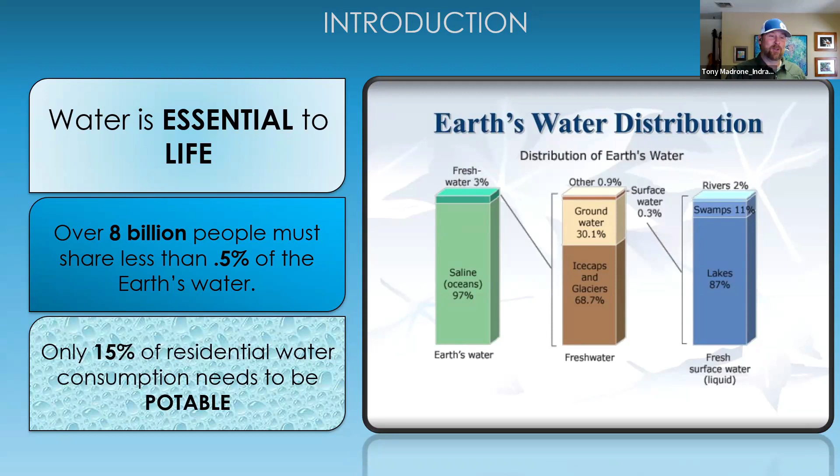So I wanted to go over a couple definitions just so we can all be on the same page with words that might come up throughout this. And if you have any questions, obviously, please do reach out. The restorative resource management. So I know we all know resource management. We approach it from a restorative standpoint, and that is a holistic and inclusive approach to resource management, balancing water, habitat, air, soil, and energy. We need our resources and they need our intelligent use.

So the idea is that I think traditionally we look at resources as, okay, what can we take? How can we use it for our consumption, essentially, as humans? And what we are trying to do is flip that around to consider our relationship with resources as symbiotic. So not only how can we receive from those resources, but how can we give back? How can we ensure that they are sustainable for future generations and around for a long time?

So that's kind of the idea of restorative resource management, is to remove the concept that the resources are here for us to take and use as we want, but more to consider them a vital relationship that we must create together. So that is restorative resource management.

Continuing definitions, we're going to talk a lot about alternative water sources today. So I want to go over the alternative water sources so we all know when I say rainwater, what does rainwater mean, right? So we're going to start with black water. We all know that black water is wastewater from toilets, dishwashers, kitchen sinks, and utility sinks. Currently, black water is clumped together with gray water. So it's all of the water that gets into the sewer piping and the drain pipes of the home. Those typically are all considered black water since it's all merged together. That's why it says can include gray water.

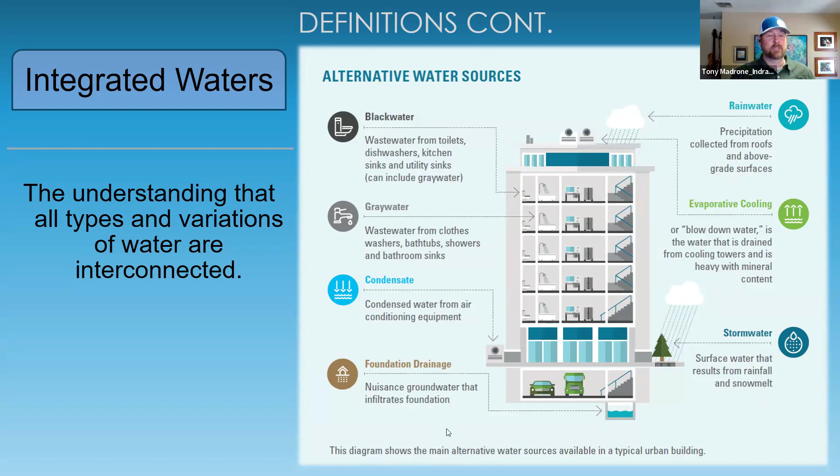Moving on, watershed. I'm sure we've all heard this, but a watershed is an area of land that drains rainfall and snowmelt into streams and rivers. I like to consider it all of the water that creates a river. What's all the water that leads into a river? That's a little too simplistic, because there are groundwater components that come into play. But essentially, it's all the rainfall that falls into an area, comes together, and typically leads into the ocean at some point.

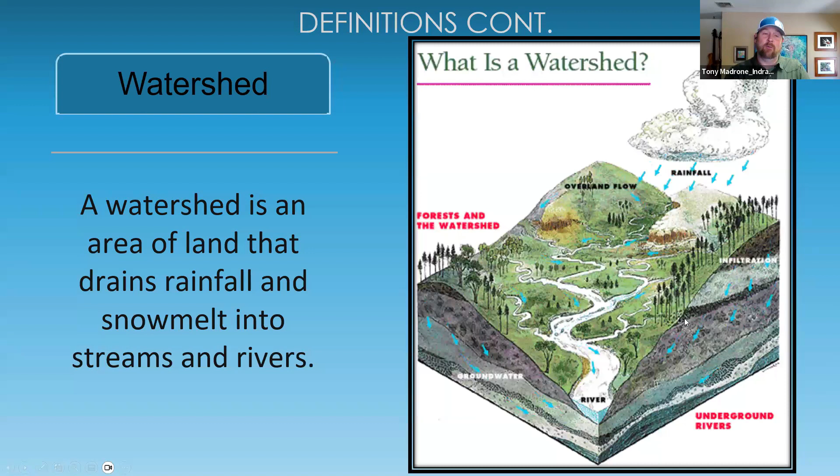So that is a watershed, and it's an important idea because any one thing that happens to that water within a watershed can impact all parts of that watershed very directly. So that is an important concept to look at. Okay, so that sums us up with general definitions. And now I'm going to go into some ideas and thoughts to look at.

I have segmented out this presentation to look at different parts of projects where we can consider water reuse, or where water is an important part. So the first one we're going to start with is buildings. And that's what I know you all work a lot on. And so this is a really important piece of the puzzle.

Something that I always try to encourage and talk to architects about is this concept of dual plumbing. Dual plumbing is the process of providing separate plumbing for non-potable and potable supplies, as well as gray water and black water discharge piping.

So essentially, how that would work, and I'll give you an example here, is that you would have your potable water supply that feeds the sinks, the showers, the refrigerator water, all of the different things that we interact with in a way that they need to be potable. But the non-potable demands in a home would primarily be the toilets, for example, or also the laundry is another example.

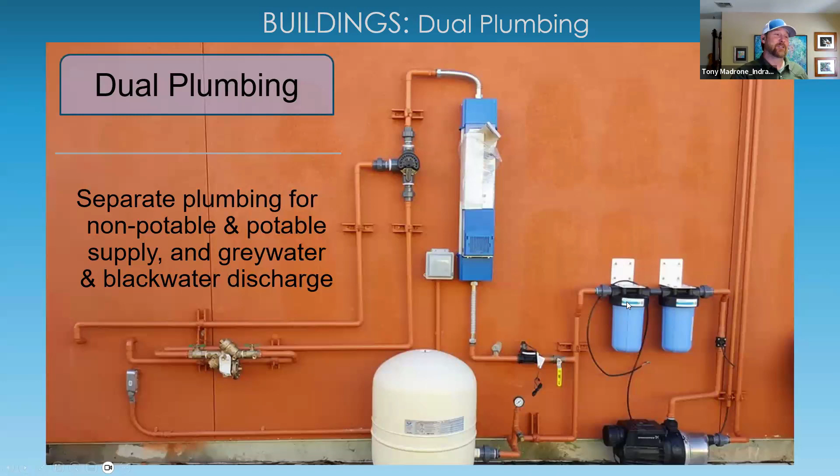So that's dual plumbing. It's really important, and it's something that I personally am trying to encourage as many people as possible during the remodel process or the new build process to just dual plumb. It doesn't cost that much extra to do when that home is being built. It's literally 10 times or more costly to do it after the fact. So if I have to get in there with my team and start cutting all those pipes up to get the gray water sources out, it'll cost 10 times as much for us to do it then as it would if it was done while the building was being built. So that's something, hopefully, if nothing else happens, that maybe you all could consider dual plumbing as something to incorporate into your designs as you go forth.

So then in the buildings, the indoor non-potable reuse. So we sort of went over that. The primary sources for indoor non-potable reuse, again, are toilets, flushing toilets, and laundry. Laundry supply is a little tricky because oftentimes you'll have hot water and cold water going into laundry. And so that hot water, it can be non-potable, but it just means you have to have a separate heating system for that water. And it can be a little bit difficult to do. So we'll typically just use the cold water feed as the non-potable reuse supply.

But non-potable reuse is the treating and reusing of rainwater, gray water, stormwater, mechanical water, and/or black water for indoor non-potable supplies, toilets and laundry. Now, the black water one, I think probably gives people a little bit of the jitters, like, oh, we're bringing black water back into the house. And so that doesn't happen that commonly. It's not one of our high level, let's do this regularly.

That's for typically larger buildings. I think a good example is the SFPUC building. If you haven't ever visited it, it is amazing.

They have a beautiful living system that takes all the black water, all the wastewater from the entire building, treats it through some natural solutions, BMPs, and treats it to the point that water can then be reused as a non-potable indoor supply, and they flush all the toilets in the building with that treated black water. So it can be done, and it's pretty cool. But definitely the rest of these are a lot easier to get prepared for bringing back into the building.

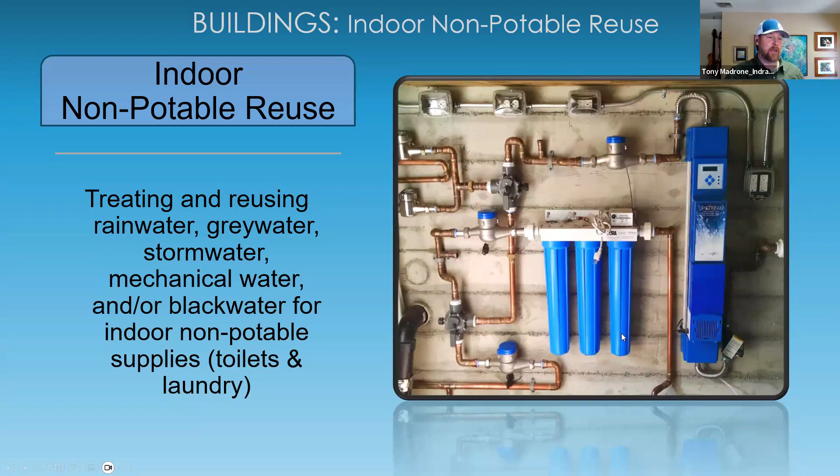So the dominant source is the gray water. So the gray water feeds first, and then the rainwater is the backup when gray water is low, and then the municipal water will be the final backup, all done automatically. And I can go into that a little later on, but so that is indoor non-potable reuse.

The other thing with buildings, and this is kind of a big one we'll go over quite a bit, would be rainwater collection. So rainwater collection is something we do a lot of. It's really clean. It falls on the roof. It's the rainwater. The only thing that makes it not clean in our area, some places have acid rain and other challenges that they're facing. But for us, it's just how dirty is that rooftop?

So we do things like a first flush filter, which you can kind of see over here. So that'll help to kind of clean anything that might be dirty off of that roof when it first falls, send that away from the tank. And then once that roof is a little more clean, we can send it into the tanks.

But rainwater collection can be used for irrigation, fire suppression, water cooling towers, toilet flushing, as well as potable water for households in some counties. Sonoma has one permitted potable water supply for rainwater, but in general, California is scared of that.

But if you go to Australia and Hawaii and a lot of other places, they use it all the time for potable water. Texas is actually significantly ahead of California. There's tons of permitted potable water supplies for rainwater in a lot of areas. So it's starting to happen in California, but there's still a lot of fear around it. What if? There's always the what ifs.

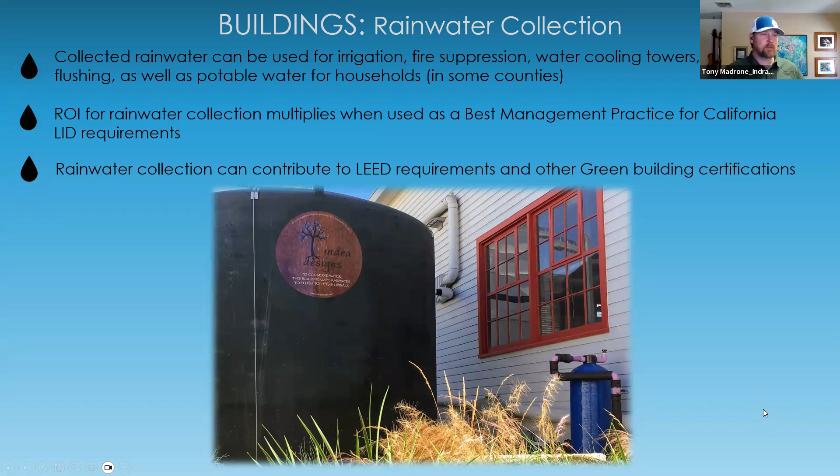So I'll give you a couple examples of some rainwater collection systems that we've done and how they can operate, just so you can see. This is a system in Menlo Park. This is a 10,000 gallon underground cistern, which was a nail-biting, fun experience of sending it over. This house was just newly remodeled, so it's a beautiful home, and we're sending a 10,000 gallon tank and a crane over. It was a stressful day.

But this system saves 15,000 gallons of water per year, and it's a 10,000 gallon tank. It's 15,000 gallons because we still use some irrigation during the rainy season, so that tank will refill a few times on average over the course of the year. It doesn't refill fully, but it will refill partially to make that 15,000 gallon number. So it's not just 10,000 gallons.

But this site also had some drainage issues, and Menlo Park was requiring them to mitigate the entirety of their rooftop. So we took the entire rooftop and put it into this tank that then overflows into a rain garden afterwards. The buried tank is nice because a lot of times, especially in the more urban environment, we won't have a lot of space in backyards or front yards. So we can be creative with underground. We can put them under driveways, under all kinds of different things.

And on top of this tank specifically was a beautiful vegetable garden. We created these vegetable beds, and they could grow all kinds of fun food on top of it. So that was a pretty cool project there.

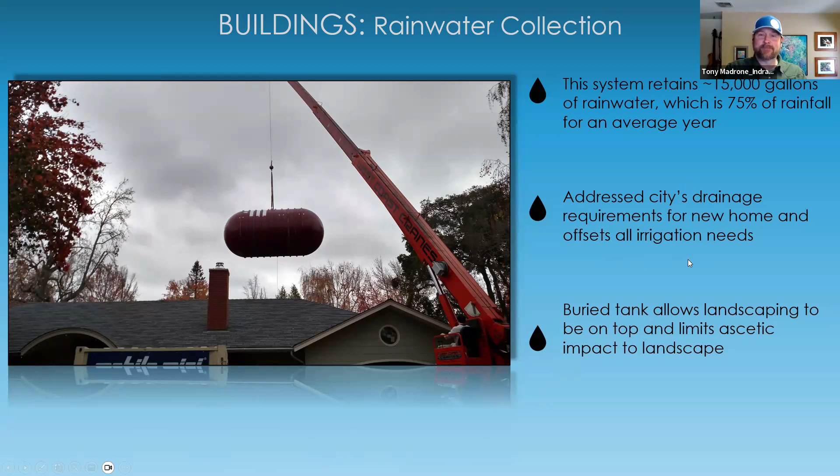This is another example of an underground system. This is an 8,000 gallon system that over the course of the year will mitigate 14,000 gallons of storm water. The rainwater is used for all the irrigation in the backyard and toilet flushing in the home. Again, this is a tiny little backyard in San Francisco. We had to work with the angle of repose and meet all our setbacks. But the city of San Francisco was really excited about this. It worked out because it wasn't a totally tiny backyard. It was kind of long, and we built a deck on top of this cistern.

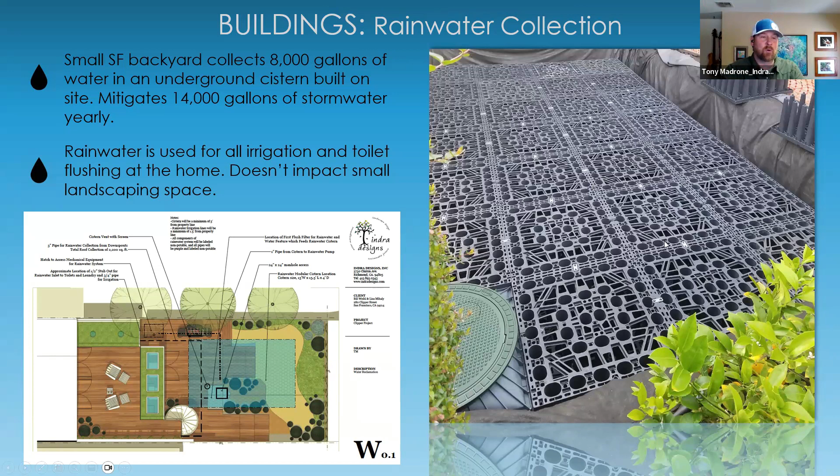So this cistern literally lives underneath this beautiful deck that they have. And then they have some landscaped areas. And again, it flushes toilets and also does the irrigation for the whole backyard there. So that's another example. And these are modular systems. I'll show you one more of these here.

What's really neat with these modular systems is that they can be any size. I mean, relative to the cube that it is, but they can be any size and shape. And they're also incredibly strong for having a 98% water capacity. 98% of this space is still water, but they have incredible strength.

So you can actually put these underneath driveways, parking lots. They oftentimes use these for stormwater detention and big projects like that. But we also use them a lot for rainwater collection, which in my opinion is also stormwater detention. And so, yeah, that's pretty cool.

This specific one is in, where was this one? Oh, Pleasanton. And it mitigates over 50,000 gallons of stormwater. The collected water is used to irrigate an entire 1 acre of landscape in Pleasanton. So they wanted to landscape this huge area and have a pool. Obviously, the city of Pleasanton was like, wait a second, you can't use all this water. That's going to drain our entire supply. But they really wanted to move forward with it.

So we helped them, one, design intelligent landscape so that we're using the least amount of water in the landscape as they could. But two, we put in this huge system that will cover all the irrigation needs for their site. And then we put a bocce ball court on top of it. So it's kind of a cool finish to the whole thing.

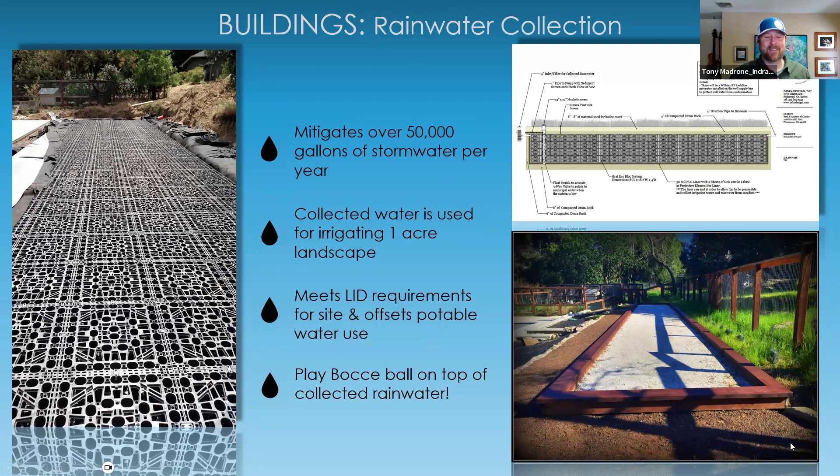But this is just some unique approaches to rainwater that's not just your typical tank that gets thrown into a yard, although most of our systems end up being above ground tanks. And then this one is the last one I'll talk about. This was back to that system in Alameda that I was talking about. I kind of already went over this, so we can mostly skip this slide.

But yeah, 92,000 gallons of stormwater off of the building's roof are mitigated and dealt with. But that means also that 92,000 gallons of potable water are saved by using non-potable water supply from this system.

Tony, I think Mercedes has another question. Oh yeah, please go ahead.

Thank you. So my question is about the use of the term, the rainfall needs. I'm not going to get the phrase right, but is there a way in which the annual rainfall calculations use some kind of average, and how do you deal with that with all of our change? Like, how does that work?

For sure. So we have a process. We can do it on a daily basis if you want. So we take CIMIS data primarily, and then we use the past 10 years, and we do a low, moderate, and high season. And we typically will size our systems to the low. At least we'll size the need of the system to the low, but then we size the piping of the system to the high. So we want to make sure that in the event of a huge 100-year storm, the pipes are big enough to collect all of that water that might come dumping off of that roof.

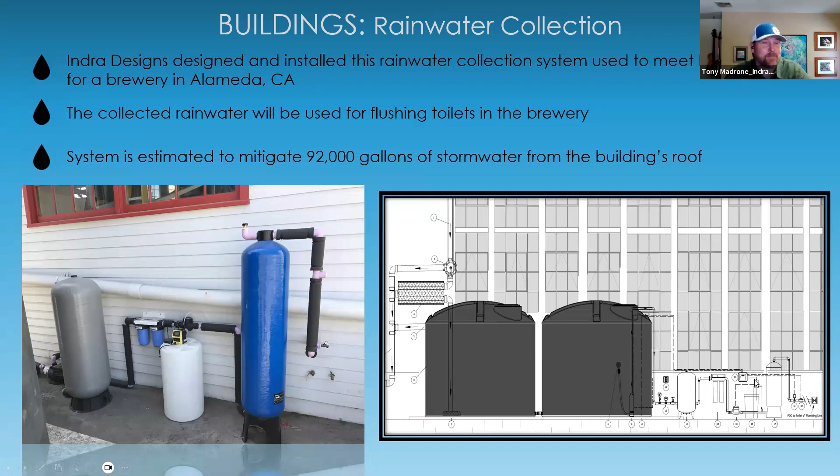Thank you. I have another question, if I can. So in California, for example, we have a diverse climate situation. We have dry deserts, we have mountains, we have snowy areas, we have coastal areas. Is the logic to these kinds of systems uniformly applicable to all these areas, or are some kinds of areas more or less conducive to these kinds of systems?

Great question. And absolutely, because it varies so much, it's very much a site-to-site situation. A good example, just to take it even outside of California, would be the East Coast, or let's say Portland. In Portland, you can have a 500-gallon rainwater cistern, or rainwater tank, and that would be enough for your entire landscape for the whole year, because it's refilling every week in the summer, or Texas, all these other places. So California, yeah, it's very climate specific.

And Southern California is much more difficult to deal with than Northern California and the Klamath region, or Humboldt. So every single site is going to have a much different analysis that's going to lead us to identify, okay, these are the demands we're trying to meet, and based on that climate and that region, these are the challenges that we face and what we need to address. Snow is a big thing in these systems. Freezing can definitely happen. So the high mountain regions are a little bit more difficult and take some more thought and care, as almost any part of the home does in those areas.

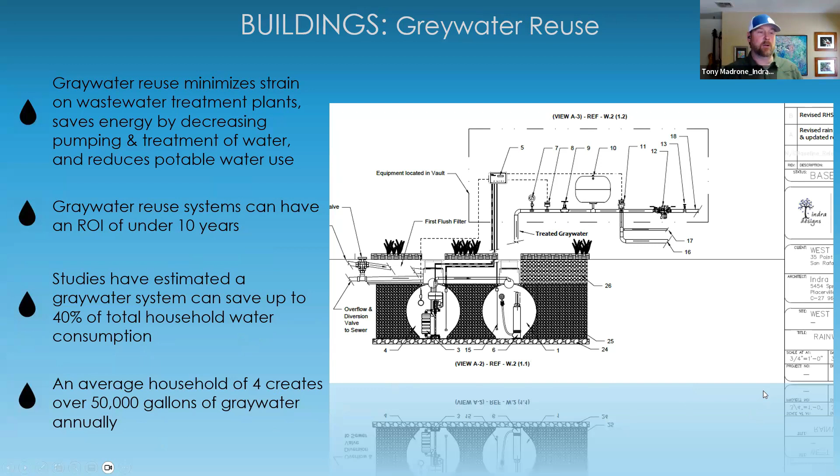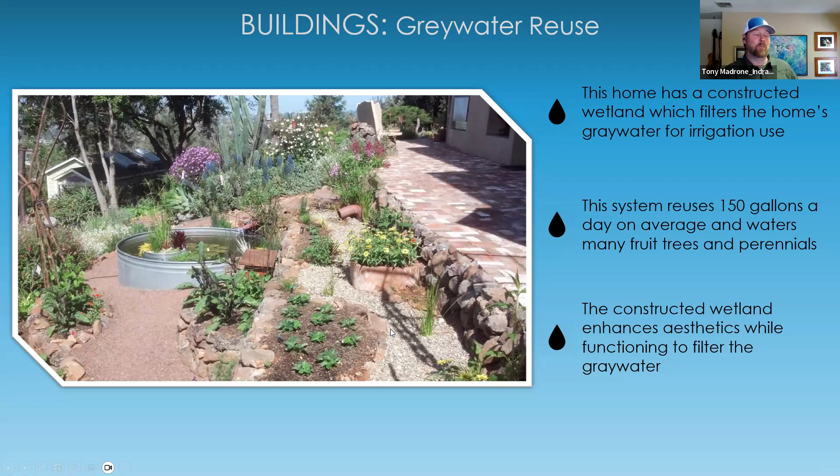This was a home that was being built, and we worked with the architect to actually design the gray water system. So we were able to say, we need the gray water pipes to come out right here. It was a wonderful experience. So that's an example of a gray water system. What I like about this type of constructed wetland is that in and of itself it's a beautiful aesthetic to the home. It adds aesthetic value while being useful to the filtration process of the gray water.

There's also laundry to landscape, which I don't have in here, but those are the simplest, no permit needed. You just take the discharge of your laundry and send it directly out to mulch basins. Yes, I have a question. You said that the gray water has to be distributed underground. So the first question is why, and the second question is, can you use the gray water to irrigate edible things, vegetables? Okay, both of those are awesome questions.

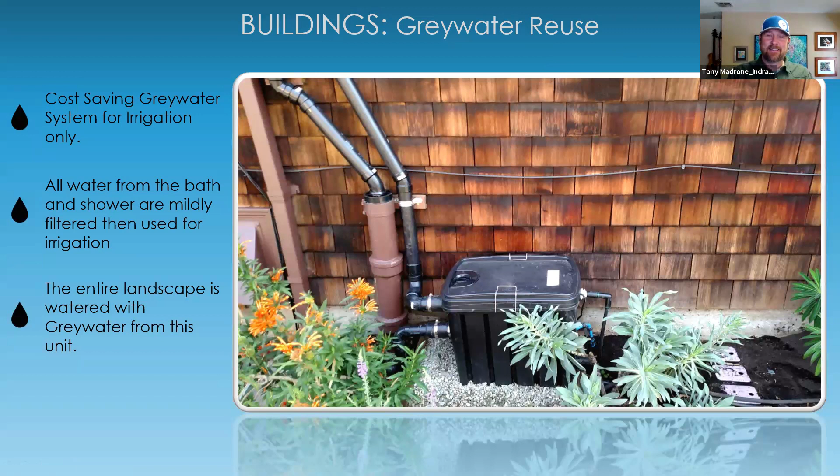All right, let's keep moving. I think I'm gonna have to hustle through a little bit. I might get a bit behind, but if we're getting questions as we go along, then maybe we won't have as many at the end.

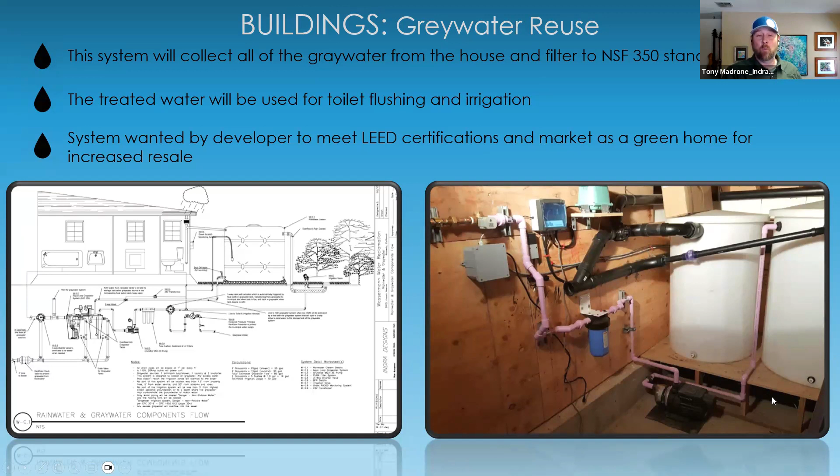Again, because it's gray water, it does need more maintenance, making sure that system really is clean, because things can go awry in gray water pretty quickly. So there's a higher maintenance piece to it than rainwater for non-potable reuse, but it's pretty cool that you can do that.

And then mechanical water, we haven't done a lot of. We did a little bit on a building in San Francisco for the cooling towers. The blow down water we used in a cistern that was combined with rainwater. And so that was kind of cool.

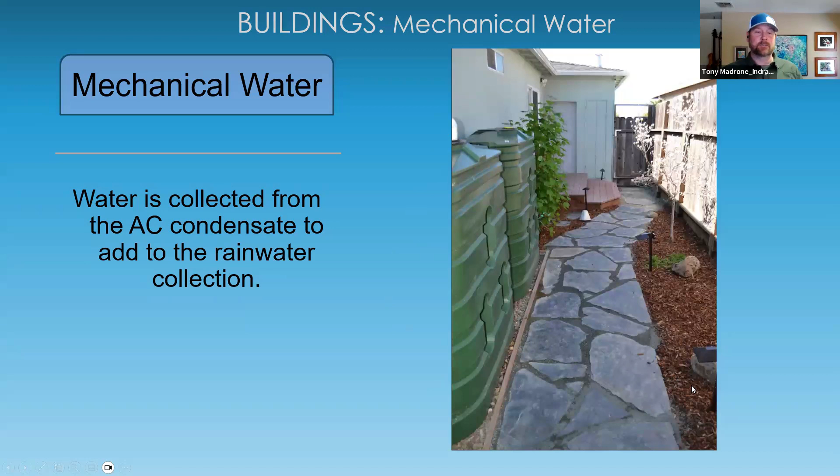And this is a small residential where we actually took the condensate from the AC, which I think ended up being, in the summer heavy running months, a few gallons a day or something here or there. But it was something. And so that got added into the rainwater tanks because they were dry by the time the AC was kicking on regularly. So anyways, it's something that can be done and considered, and just a nice reuse for that condensate.

All right, so that was buildings. So now we're going to move on to sites. And again, I know you all do this. You have to do your grading plans, your drainage plans. All of those are essential for the building that you'd like to put on that site. You have to really consider the site.

So we like to consider ourselves the step before the civil engineer, and we oftentimes will make the civil engineer's job easier because they'll have less drainage to deal with, less issues and challenges, and less grading needs to deal with the stormwater.

So site water, again, is all that water that's falling on the site that's not the rooftops. And for stormwater and site drainage, there's a bunch of natural solutions that can be considered to mitigate that stormwater that all happen before the drain basin, before we get it into the pipes and send it into the stormwater system.

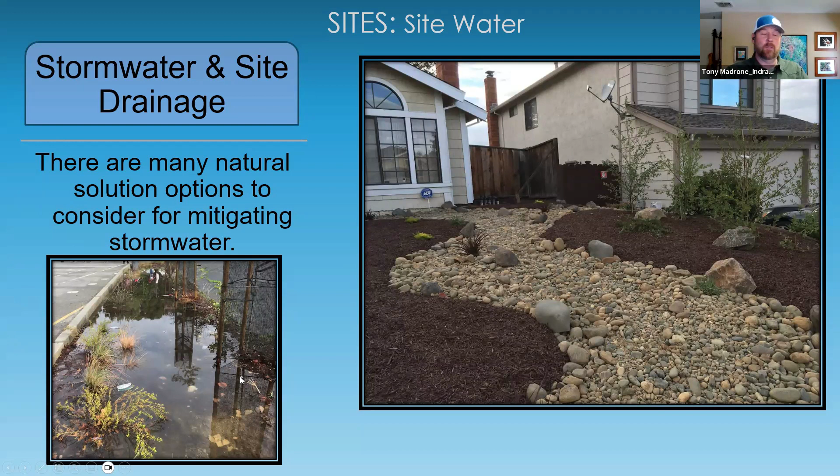So, and then here's that site for the water quality. I wanted to say this is another large bioswale that we did. This is in Richmond, and this is off of a parking lot. So we went into a parking lot, we redid the parking lot, and actually added 2 parking spaces, even though we made the parking lot smaller. And then we did all these curb cuts along the edge of the parking lot here. And we added curb cuts into all the little, there's another bioswale that's up this parking lot a little ways.

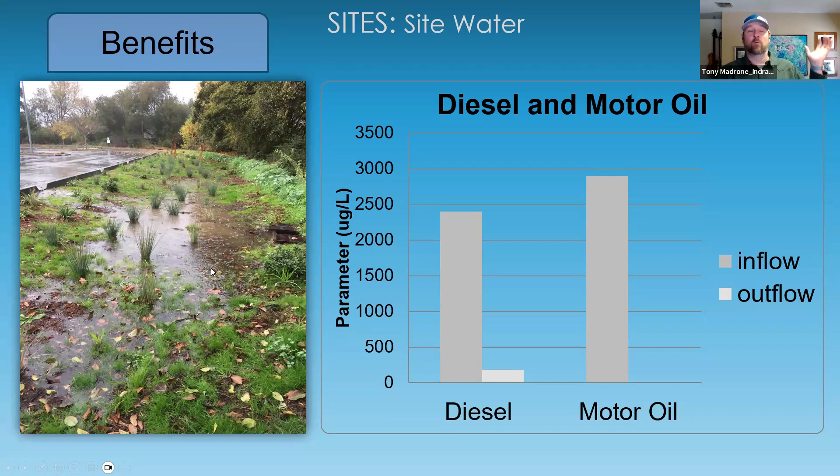And then amazingly, motor oil was a much higher number. And by the end, at the outflow where that goes into the creek, we had 0 trace of motor oil. So this is just a good example of how on sites we can do water quality enhancements, not to mention just the erosion, simple erosion getting into our creeks and creating all the problems that they do there.

All right, so for sites, there's also reuse for irrigation. So, inevitably you're going to have landscaping on your site after the home is built, and that's going to need water. And so for that irrigation, do we really need to use potable water supply? Like, shouldn't we save that potable water for the 8 billion people that need to actually drink it? So there's a lot of reuse opportunities as we've gone through: rainwater, gray water, as well as rain gardens and different things that we can do. So just really taking that into consideration, let's make sure that that irrigation system doesn't take potable water if it doesn't need it.

And then civil collaboration. So, be civil, right? So again, we have a civil engineer that we team with. So we can be brought in to be the civil team. And so that can happen, which in our minds is great because it's very fluid and flows well. And they're open to all of our crazy, wild, natural solution ideas. But even in a situation where there's an existing civil, as this site was, we can come in and we can support and help solve some problems.

So the civil was actually planning, I don't know if you can see my mouse, but they were planning this huge planter bed here that was going to be 3 feet tall and had bubblers in it. It was going to deal with all the site drainage and all the issues and challenges. And it was just this aesthetic nightmare as far as we're concerned. And the developer was very upset that their multifamily home was going to have that. So it was like, can we get rid of that?

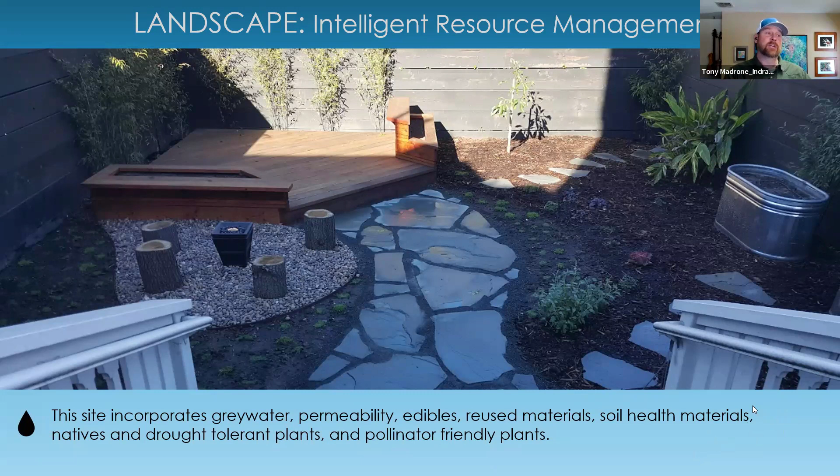And this just adds that beautiful value to the home. They say that curb appeal is 25% of the home. And I think also the health and how sustainable the home is is probably significantly about what the landscape is as well. So making sure that that's a consideration when you're having homes built is really important.

Okay, I have a little bit. I can run through this again quickly. Are there any questions at this point? I can get to the end of my presentation in the next few minutes if you want me just to run through. But if there's any questions, please let me know. We're good. Okay, we'll continue.

So I just wanted to go over our project and program process. So we also do programmatic pieces.

Oh, I see something in the chat. Here, let me check that real quick. Oh, that's just something else.

Okay, never mind. So I wanted to just go through our process. We team with a lot of architects, a lot of civil engineers and a lot of developers on doing the type of work that I showed today. And this is just kind of our general process of how we do it. So we help with development.

If we get brought in early enough in the planning phases, we can help talk about some of these things like, instead of doing this drainage plan, why don't we consider doing a bioswale that can then eliminate your need for all those drain basins here and here and here. Let's do rainwater collection so that we're not worrying about the amount of stormwater coming off of the rooftop. You don't have to take that into consideration for your drainage plans.

So we can help with a lot of those pieces of the puzzle if we get plugged in early enough, especially with the landscaping. Outreach, again, programmatically, we do a lot of programs throughout California with different nonprofits and different water agencies and DWR. And so we'll do outreach into the communities to try to educate people on the opportunities. Like, you can do these things at your home, and let us help. So we'll get involved there.

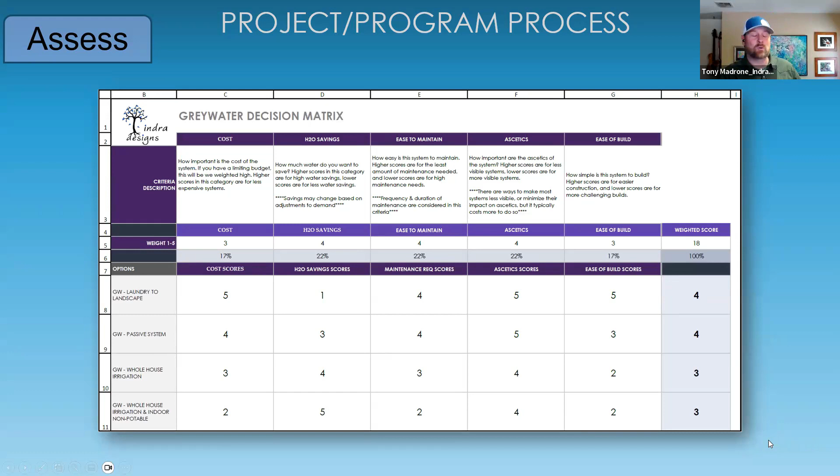And then site assessments, obviously, we're looking at, okay, where can we put rain tanks? Where should we do gray water? Is the gray water accessible? All that stuff. So we do a lot of different site assessments. And then design, we do design, which this is a water example. So this was a gray water system that was the NSF 350, flushing toilets, doing laundry, but also an underground rainwater cistern over here to collect all the rainwater off of the home. And so we were looking to mitigate 70% of the home's water usage from these two things. And here's some of the graphs that we use. This is part of our assessment package that we then plug into some of our designs.

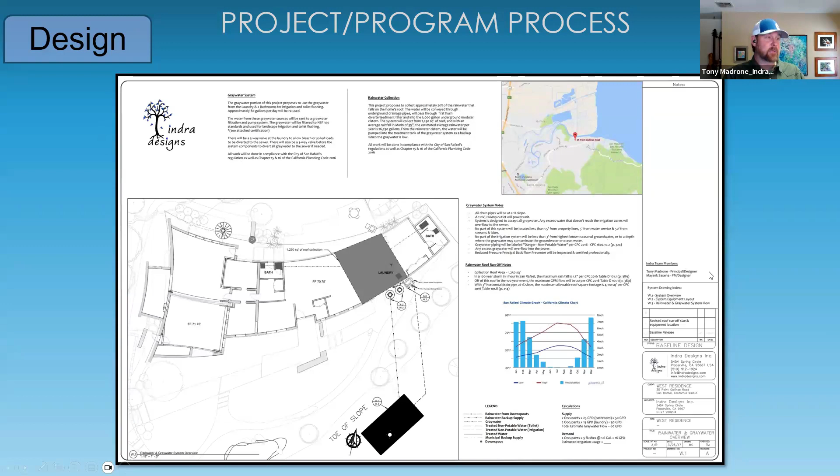But yeah, we can do design. We can do, again, stormwater and drainage design with natural solutions as primary focus. Then we can do the rainwater, gray water, all the alternative water usage. We can also do landscape design. And again, I have a civil engineer that we work with that we can bring in to do civil components of designs. And oversee. So we oversee the construction. And again, that was what I spoke about earlier. Oftentimes we'll be out there doing some of the more technical pieces of it, whether that's the telemetry and the monitoring that we might be doing, or if we're doing a special tank, or something really kind of unique that we maybe want to just do ourselves. We might do some stuff ourselves, or train people while we're doing it is the other option.

But we love training plumbers and landscape contractors on these tools because, again, I feel like it really helps to spread this type of work, and the more people can do it, the better it is. There hopefully will be more and more demand for this. And so, at the end of the day, we have really low capacity. I mean, our firm is probably one of five firms in California that can do what we do. Obviously we do it better than all of them,

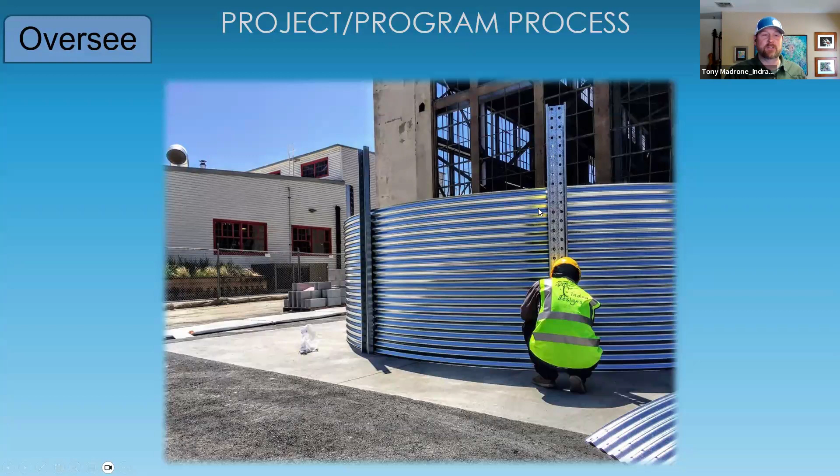but there is the reality that there's not enough people out there. And I worked with someone who said their dream is to have, just like when you're developing and an architect is doing a new home, you have to have a solar person there, energy, right? They want to have a water person there as well, a water consultant, every time. So that's what we're looking to, and we want to build that capacity.

I get a text message when a tank is low. I get a text message if the pump is not putting out enough pressure. I get a text message if any of these different things go wrong, and then I can check the system. I can also override the system remotely. I could be hanging out in Bali, which sounds great, with my family, and something could go wrong with the system, and I could change that valve so that it goes to municipal and let them know I'll be back in a couple years to help you with your system. So there's cool things we can do with this kind of telemetry and monitoring.

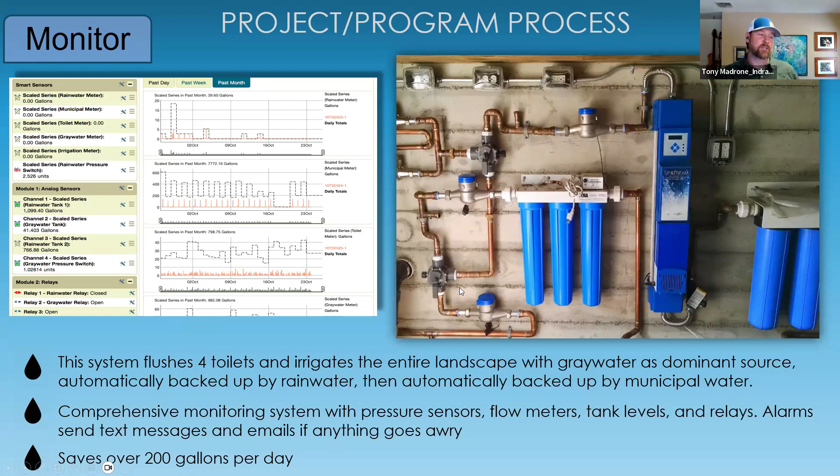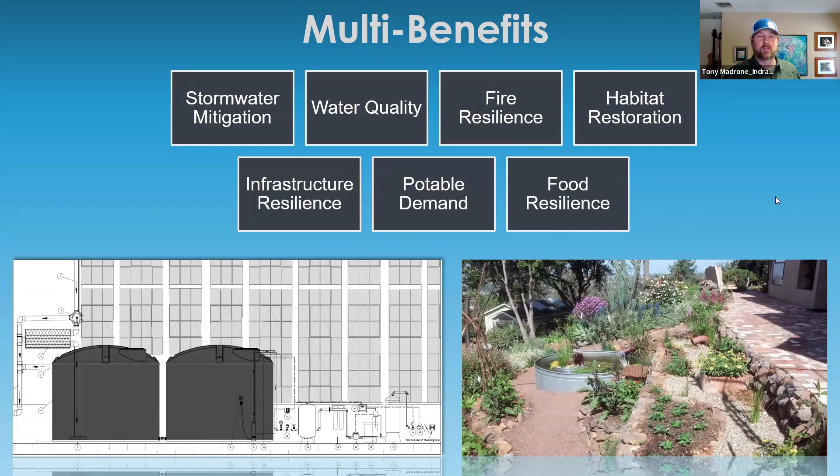Multi-benefits are just big. Saving water is obviously huge, and one of the reasons we do it, but a lot of other multi-benefits come into play: stormwater mitigation, water quality, fire resilience, habitat restoration, infrastructure resilience, potable demand, and food resilience. So don't forget all the important things that come into play.

And then the last thing is this programmatic thing. Okay, a 500-gallon rainwater tank might not seem like much on one site, and does that really matter? Is that really going to help us in the long run as a civilization to make the important changes we're trying to make? The answer is yes, especially when you aggregate those impacts. And so it's really important to look at these aggregated impacts.

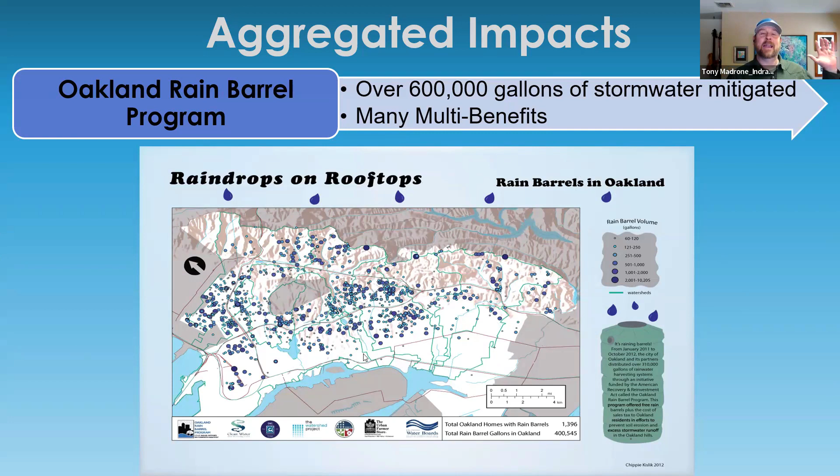This is the Oakland Rain Barrel program that went on in 2012. We installed a few hundred rain barrels during that time. We were one of their main partners. And they now mitigate from that program over 600,000 gallons of stormwater, not to mention the potable water saved, which is also at least that much. And so once you start really adding these things up, it really comes to be a large impact and really important. And that is my presentation.